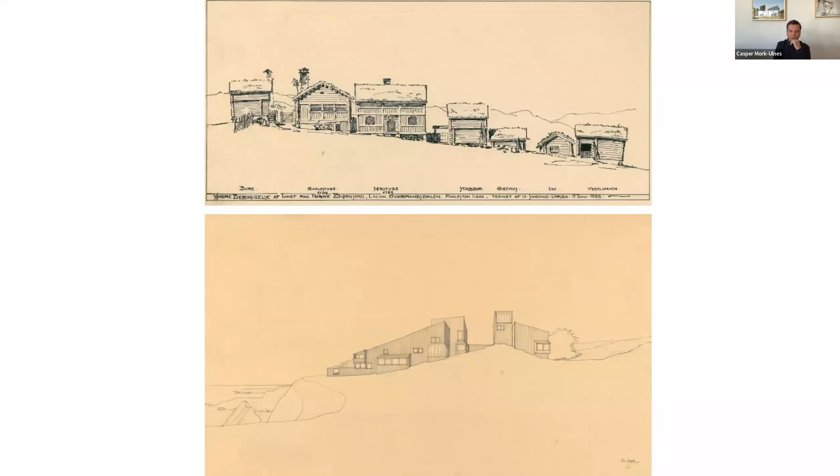Regarding the relationship of landscape to our buildings, our projects often explore the balance between being the object in the landscape and being part of the landscape. The first building at Sea Ranch is the illustration at the bottom, and the illustration at the top is the traditional Norwegian farm. The drawing of the Norwegian farm shows stepping buildings organized as a series of volumes clustered together, creating a collective form, growing over time and conforming to the landscape. It's a very typical typology you see all through Norway.

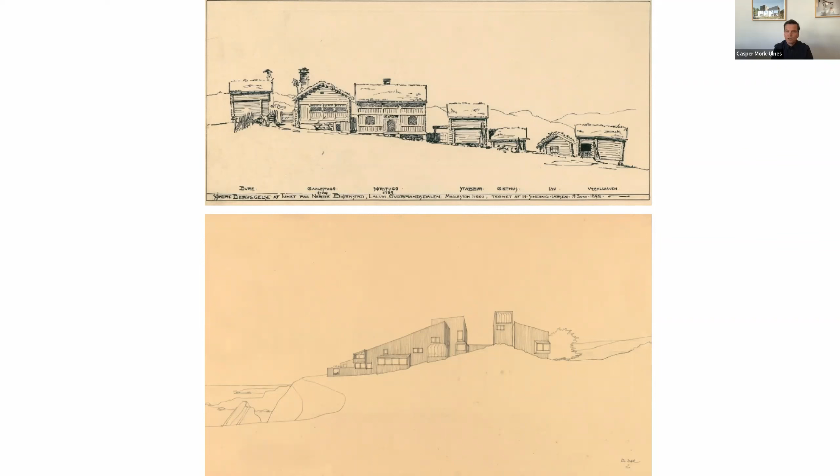Similarly, the building here at Sea Ranch integrates architecture and form to work with the landscape and nature, performatively responding to the strong prevailing winds coming up the coast, and also learning from agrarian structures of early settlers on the California coast, like the image I just showed, hugging the ground and following nature and the landscape. In both cases, I think it's an intelligence passed through generations, a heritage shared through architecture.

Lastly, the difference between the two cultures with regards to our clients. Obviously there are briefs, personalities, economic situations, etc. But in Norway, clients tend to be more practical and functionally driven, wanting low maintenance and simplicity. This might be ingrained in the culture after living in such a harsh environment for thousands of years, and also because prior to the oil economy, Norway was a relatively poor country. Our California clients, we find, are often more open to playfulness, which might follow a more open cultural lineage, and obviously the gentler climate that allows for this.

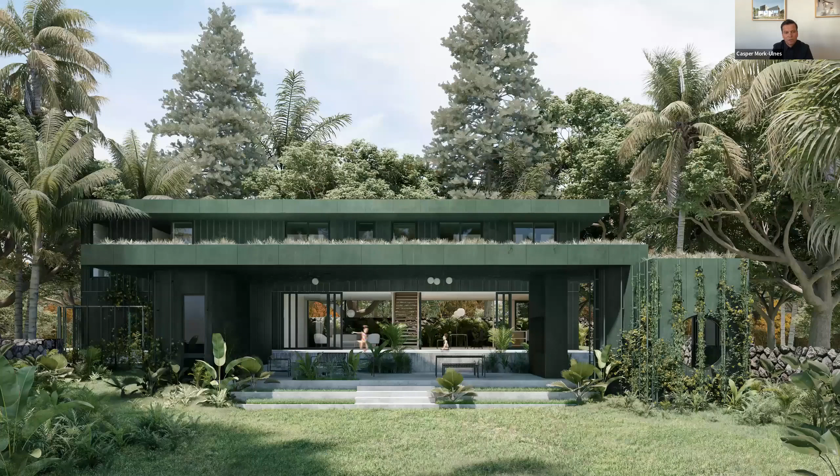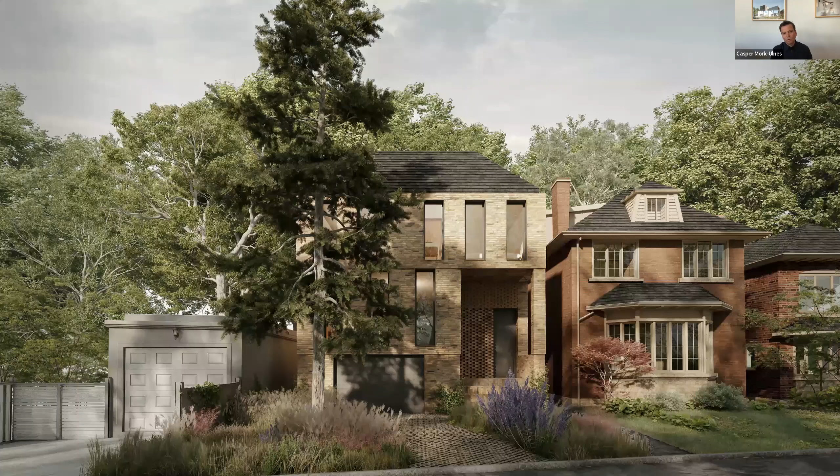So there are obviously contrasting directions from our clients in each location that affect the projects. Importantly, our project locations are starting to expand beyond California and Norway, so we're being introduced to new contexts and influences, which is exciting. We're studying new regional and cultural contexts, always enthusiastically looking for new responses to our clients' briefs. We have projects as far west as Hawaii, as far north in North America as Toronto, and in more far-flung parts of Europe, exploring these different geographic, cultural, and environmental contexts to drive our work forward.

This is the first group of projects I'm going to show, and the theme for the first three projects centers around buildings that reach out into the landscape, often to crop a particular view. This first group also has a similarity in spatial qualities, particularly in the floor plan. This first project is just outside of Oslo — a modest cabin of about 850 square feet with a small annex containing a sauna and some storage areas.

This is a traditional Norwegian cabin, drawn in the 1850s. It's very pared back and simple, and as you can see in the plan and section at the bottom, there's a central fireplace hearth that forms the heart of the building and creates different spatial zones within the cabin — areas for sleeping and areas for living. It's this fluid spatial concept, with the hearth as the solid element in the center, that really organizes the space.

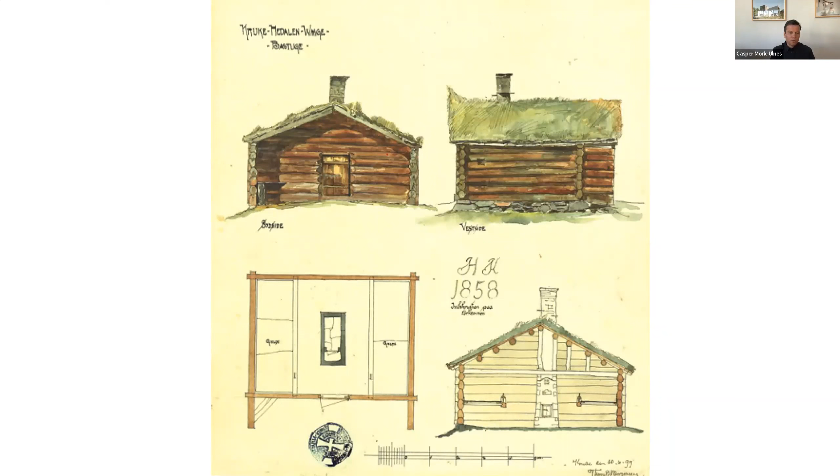So the concept here was to have these shifted wings that produce a pinwheel configuration, concentrating the sliding snow in two directions. This allows for two outdoor terraces and entryways that are free of falling snow and ice, based on the orientation of the building as well.

This creates two sheltered outdoor spaces, one for the morning sun and one to enjoy the evening sun, basically on the left-hand side and the right-hand side of the building, to make use of the limited solar exposure in this climate.

Additionally, there's views in different directions towards a lake, a forest, and a hillside. So as a strategy, we designed with the views in mind, with each one of the wings of the building pointing towards a view.

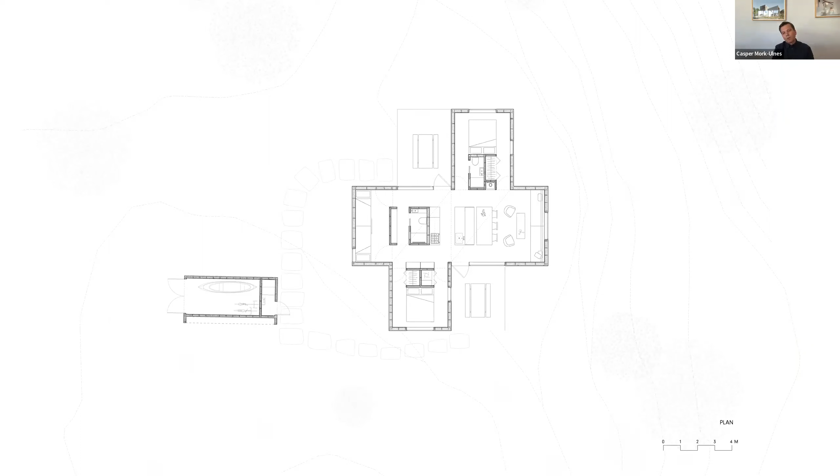That really helps with the economy of the space, making it feel, it sleeps 12 people, and it feels a lot bigger than it actually is.

The spatial arrangement gives an idea of the ability to allow expansive openness even on a small footprint, allowing the wings and zones to flow freely around the cabin and to the exterior. The center of the pinwheel plan becomes the hub of family life.

The functional roof profile combined with the pinwheel configuration produces a prismatic geometry that doesn't have a singular presence on the site, so you never perceive the building in its totality. It seems to change in size as you move around it, with a diminishing effect of scale, softening the impact on the site.

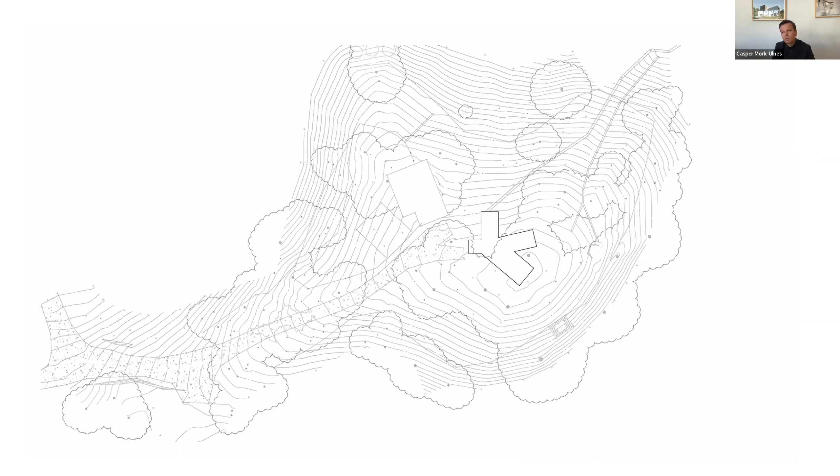This project shares some of the themes we explored in the previous project, but this is in California. It's also a cabin, about 1,100 square feet, slightly larger, on a remote site in the hills of Mendocino County. The site offers a unique overlook onto three locally celebrated landmarks, with beautiful heritage oak trees throughout. Working around the trees and the views were really the drivers of the design, so the challenge was providing those three views the clients wished for while saving the trees.

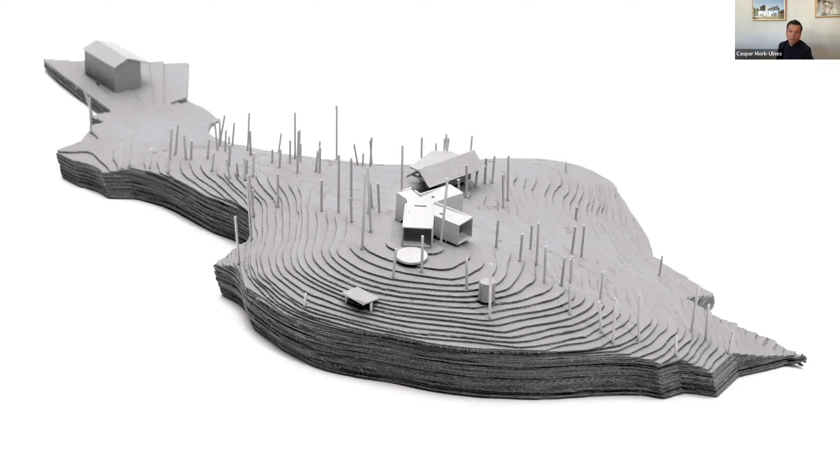The solution was to have more of a branching plan, instead of a pinwheel plan, that extends in each direction of the view, framing the landscapes beyond.

The first thing we did was meet with an arborist who told us we couldn't use conventional concrete foundations since that would sever the oak roots. So instead, we came up with a solution with the engineer to use slender piers and steel columns to avoid the roots, navigating the volumes around the trees, capturing the views and getting quite close to the trees with thin steel posts.

On one side, the building really hovers over the landscape, and the only part that touches down is the entry on the right. From the other side, it's barely lifted off the ground, maybe 6 inches or so at the lowest.

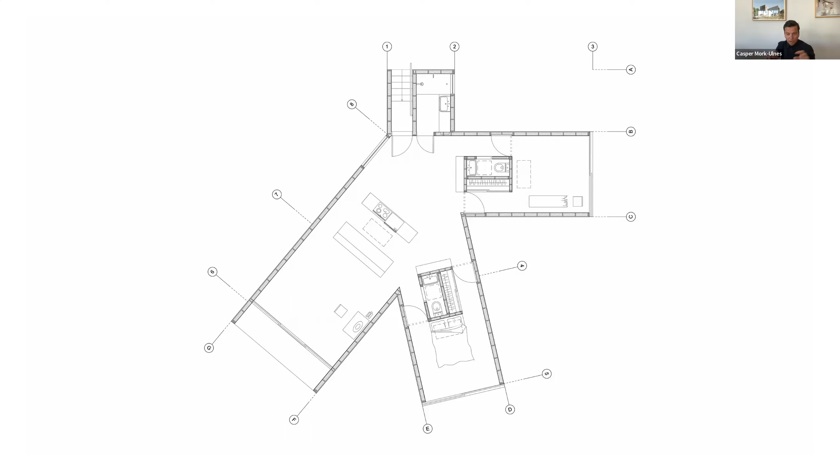The project had a very tight budget, which meant we had to keep the building compact. We used the same strategy as the previous project, placing the essential functional elements into utility cores that became anchors in which the rooms are more loosely defined, allowing for an open plan and continuity across all the rooms at once, with the doors being open as shown here.

Here is the convergence, the middle of the plan, where you can see it's an open and flexible center that has a vantage point out onto all three framed views beyond.

We didn't use large expensive glass, due in part to economy, but there was also the desire to really frame the particular view at the end of each space so that it appears open, but it's really succinctly calibrated to the views the client wanted to capture.

Similarly to the last project, there's an economy of materials with a directive from the clients to cut costs and minimize waste. The building was designed on a 4x8, 4x10 sheet, standard size, off-the-shelf sheet module.

The last project in this group is a bit larger, and we just completed it recently. It's maybe a progression of the themes I outlined so far, but it expands a bit with the use of courtyards.

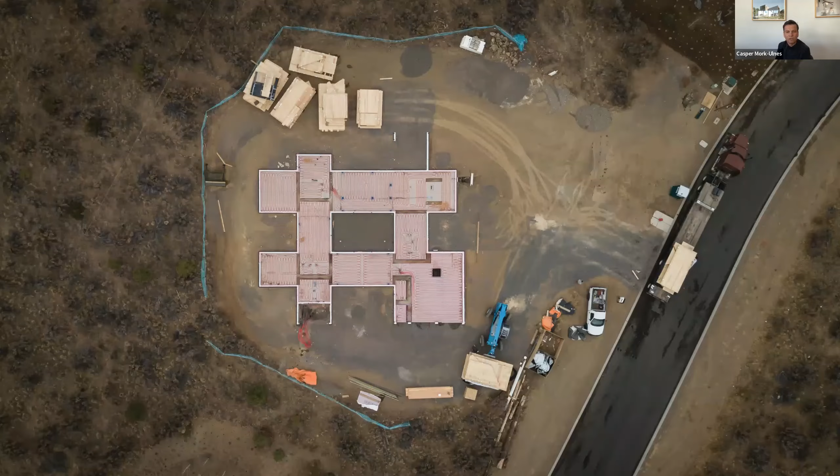On the top of the slide, you see the cross-laminated timber panels being staged, ready for installation. And here's a slide showing the CLT, as they're called, panels being installed.

I believe these were some of the first CLT panels produced in the US, and it was from a plant in Montana.

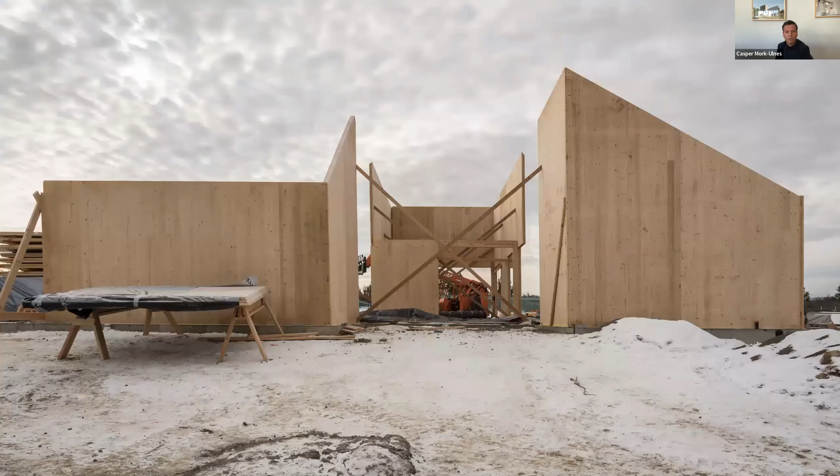Regarding the plan configuration in this project, courtyards that are both open and closed were used as a way to organize the space and shield from the hot summer sun as well as the winter winds.

The wings really reach out into the landscape, with the courtyard in the center becoming the hub of the home, creating more private spaces around it.

The roof form has some similarities with the first project I showed, but it's multiplied over a woven plan rather than the pinwheel cruciform plan.

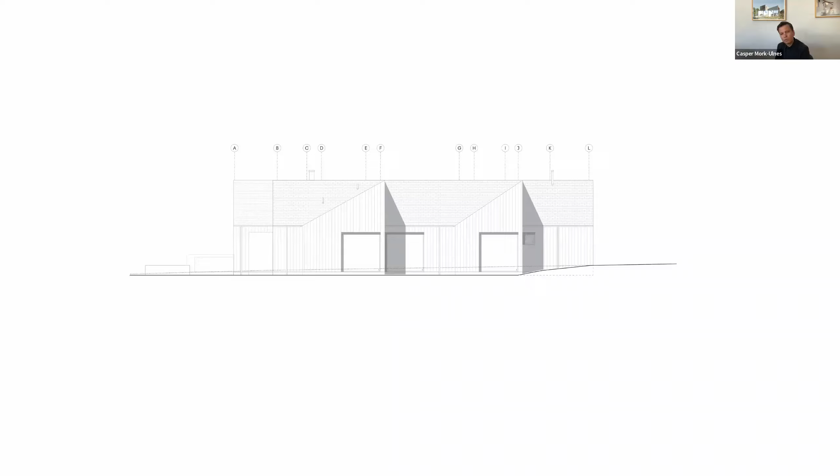So the building has a very different presence again on all sides, pursuing a sort of play with perception, evading this sort of singular reading as you're moving around the house on the exterior.

The dramatic slope of the roof obviously helps with shedding the snow, but it also has the benefit of introducing generous ceiling heights into each room.

Because the plan is such that the depths of all the spaces vary, but each room is the same height, the varying footprint gives you really a range of spatial qualities throughout the house.

The cross-laminated timber was left raw, and there was a lot of attention put into hiding the plumbing and the electrical to allow this completely wooden interior.

Here you can see some of the formal similarities to the two previous projects, but given more that it's a woven courtyard sort of mat typology.

It also has greater indoor-outdoor connection due to the larger windows than at least the Mylla cabin, and direct physical access to closed courtyards, as well as to the landscape beyond.

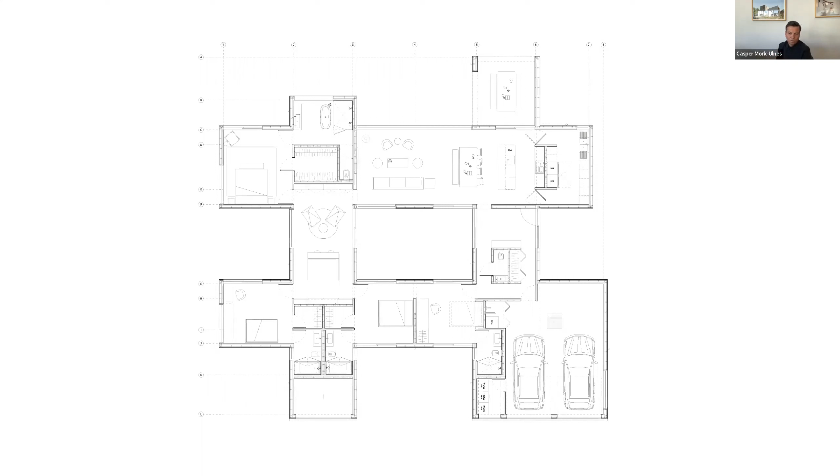But like the two other projects, the plan is really arranged to flow around the different zones of the house. So it's a house almost without corridors, and it has a porosity too, with views through the building and the courtyards out beyond to the landscape.

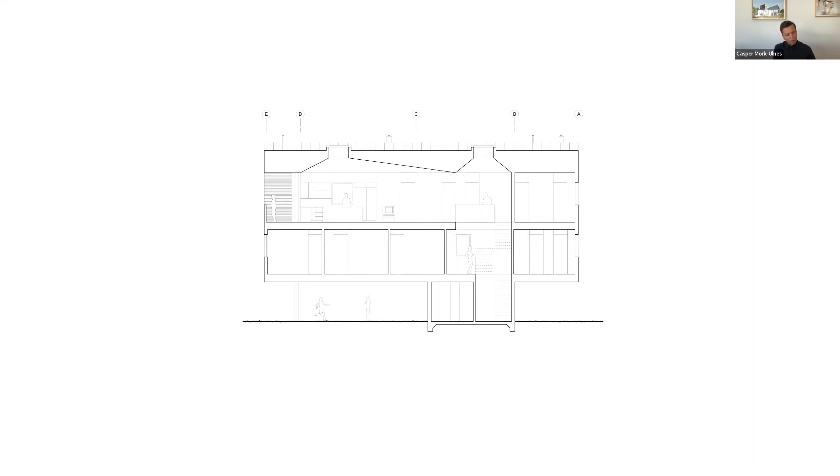The concept here was based on the Alpine Chalet building, where the house is lifted onto a plinth, in this case concrete, to protect it from the large amount of snow in wintertime. In the section, you can see the programmatic stacking, with the mudroom and ski area on the ground level, bedrooms on the second level, and public rooms on the top floor, punctuated with two skylights to define the public spaces. One skylight brings light all the way down into the ground level room.

This is the traditional Norwegian solution to deal with high snow, where the part of the building necessitating light and air is lifted off the ground, and a protected stairway mitigates the impact of the snow in winter.

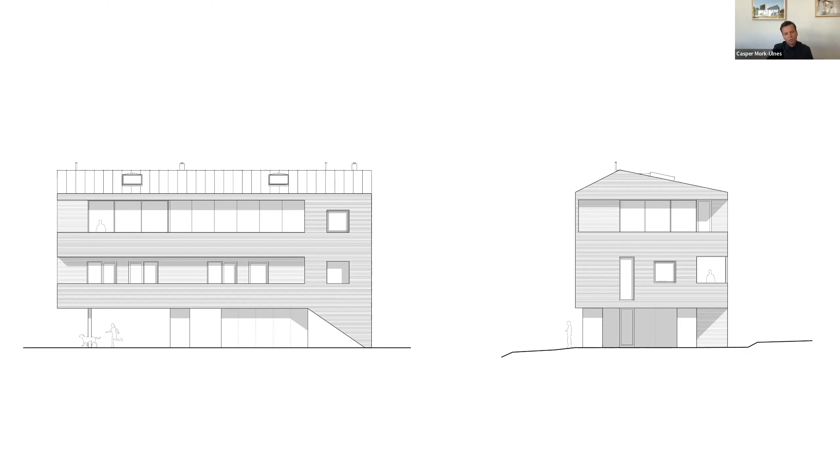This is our elevation of the south and west facades, showing the stairway and the concrete plinth. This is the north elevation, where the bathrooms, kitchen, and private program are stacked on this side to allow for minimal window openings, minimizing thermal loss on the north facade.

This is the same view, but with the lower level buried in snow. In the last few years, we've often seen snow all the way up to the windows on the second level. Here's a view of the concrete plinth, which needs to be robust so it can sit exposed to the snow for extended periods of time.

There are deep overhangs on the west and south facing facades to protect the large glazed openings and balconies from the snow. The pine tar I referred to earlier with the cousin storehouses is also used here - this is a stave church, very close to the farm and also quite close to the next project I'm going to show.

Both the stave church and this project in Tahoe are coated with pine tar, a sticky material produced by high temperature carbonization of pine wood. It's a key element in preserving Norwegian wooden structures, including this stave church, built around 1220, of which almost 30 still remain in Norway - buildings almost 1,000 years old, with the wood going almost all the way down to grade level, except for sitting on a concrete plinth.

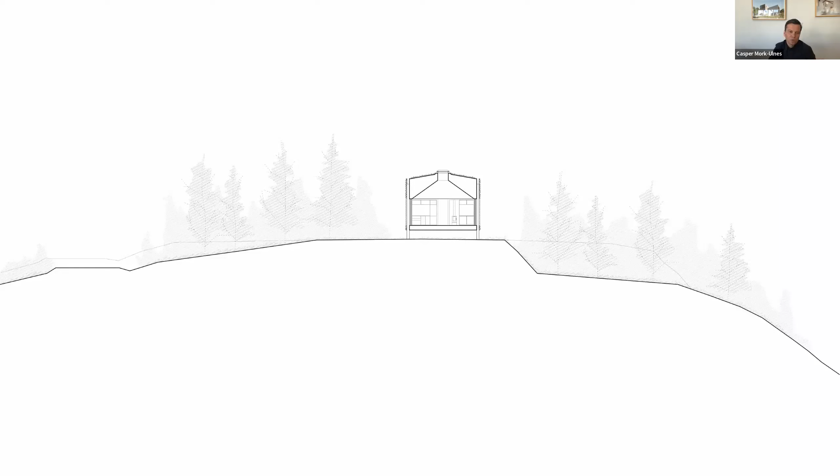It was important for us to save the existing topography and some of the old animal paths that went through the site, and also to deal with the snow issue. So the building is also lifted, similar to the previous project, following a common Norwegian historical approach to elevating buildings to straddle the topography, not just for snow.

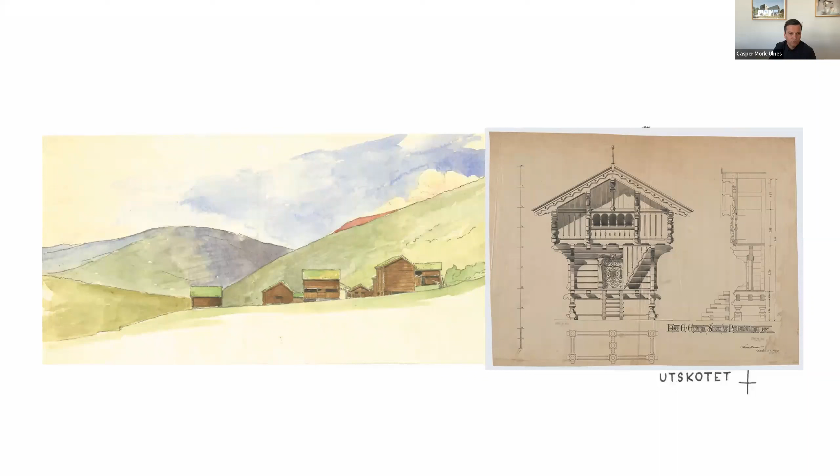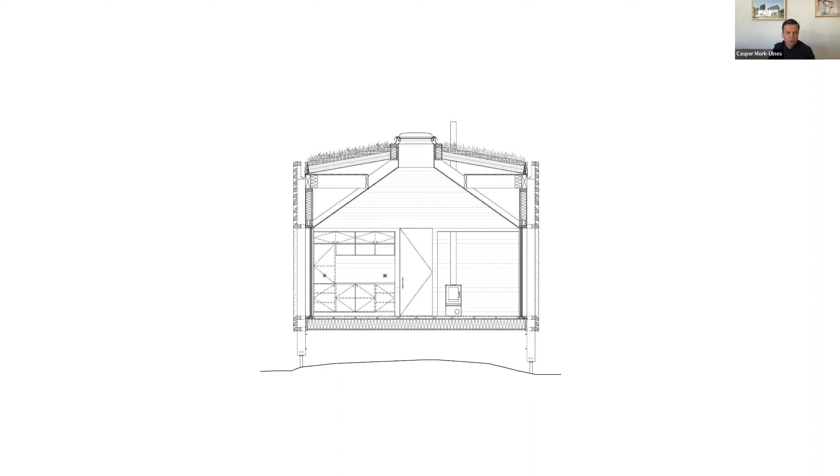Plus, buildings that also have a traditional sod or grass roof. The building is supported by 45 columns, so the cabin hovers between a foot to almost 5-6 feet above the ground, depending on the terrain below. It touches the ground very lightly, with cross-laminated timber columns sitting on very slender steel feet drilled into the rock surface, or sitting on tiny concrete piers where we couldn't reach the rock surface.

This diagram illustrates the assembly of the cabin, with the top part showing the roof being overgrown with the same native grasses found on the ground plane below, and also in centuries-old Norwegian buildings. A very simple technique, not comparable to the technique of doing green roofs here.

Below that, you see what we call 4 frustum-shaped ceilings with roof windows that punctuate and really divide the cabin into 4 spaces, with the intention to make it feel like 4 small cabins in a row instead of one larger space.

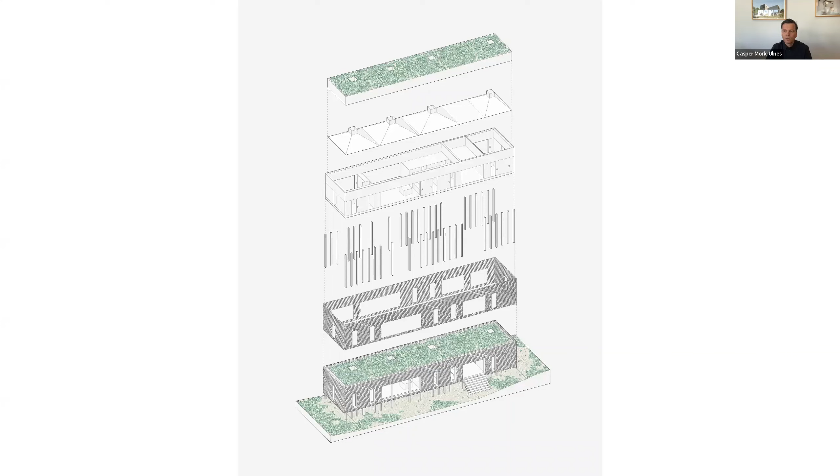Then we have opposing windows that allow you to see through the cabin and onto the adjacent landscape, so every room has a view. Then the columns, and the last layer is the wood skin that sleeves over the columns - really there to just protect the waterproofing membrane.

This shows the existing animal path from the parking area leading to the entry. The entry is a large punch out in the building, which creates the entry sequence and also hints at the visual permeability that runs through the entire house.

The plan in some ways follows another local historical precedent - a very simple typology with a long and narrow house, central circulation, and opposing windows to the exterior on opposite sides. This is a very traditional typology on farms, where as the generations could afford to, as economy or family needs allowed, they would add another carcass to expand the overall size of the house.

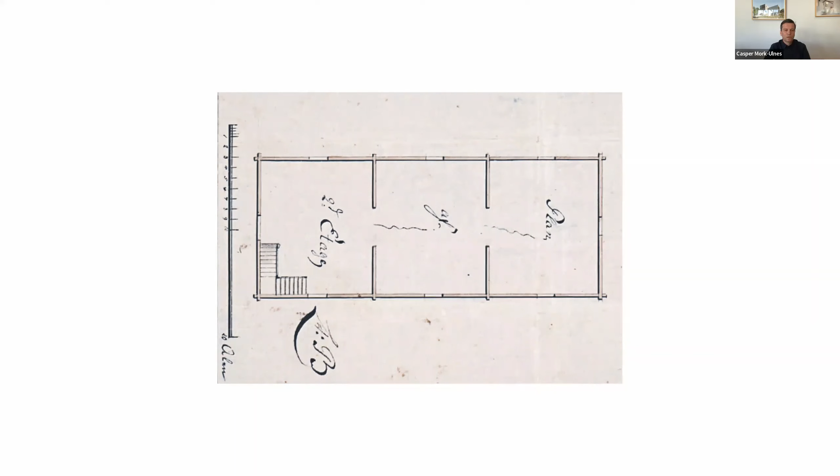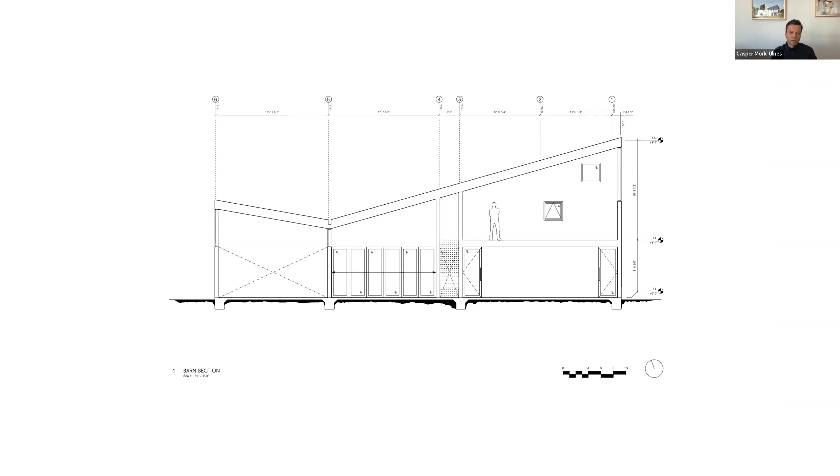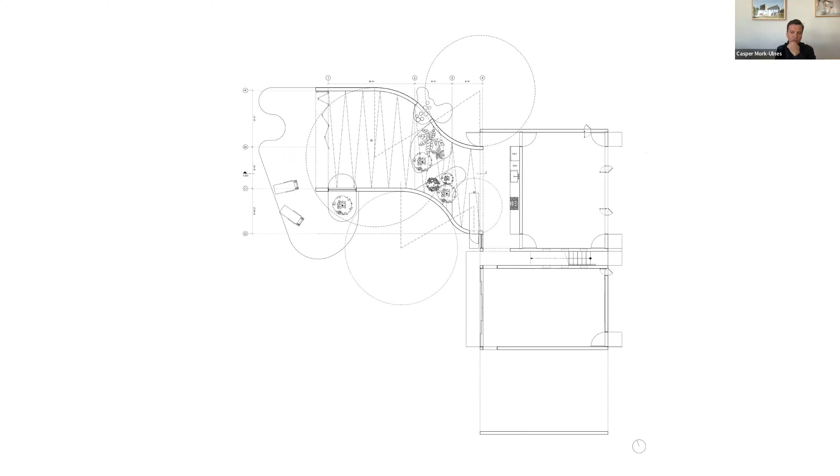About a year after we completed the main barn, our client asked us to design an extension to house an outdoor-indoor dining pavilion, and that's the result you see on the top left-hand side of the slide. This sort of more amoeba-esque form became an extension to the barn to host an indoor-outdoor kitchen, dining area, and a garden. You see the amoeba-like form emerging out of the existing barn structure.

With curving concrete walls standing in contrast to the rectilinear barn, yet tying the two together with the formwork, the concrete, the texture on the amoeba was created by using recycled wood siding, the same dimension and pattern as was used on the existing barn.

So both of these outward reaching forms are also extending upward, directing the inhabitants back to the landscape. And the landscape also reaches into the dining room through these organic planters that push into the interior space.

The curving walls were built out of gunite, which is basically spraying concrete up against the formwork, which means that the interior was hand troweled and smooth, and the exterior has the wood siding texture.

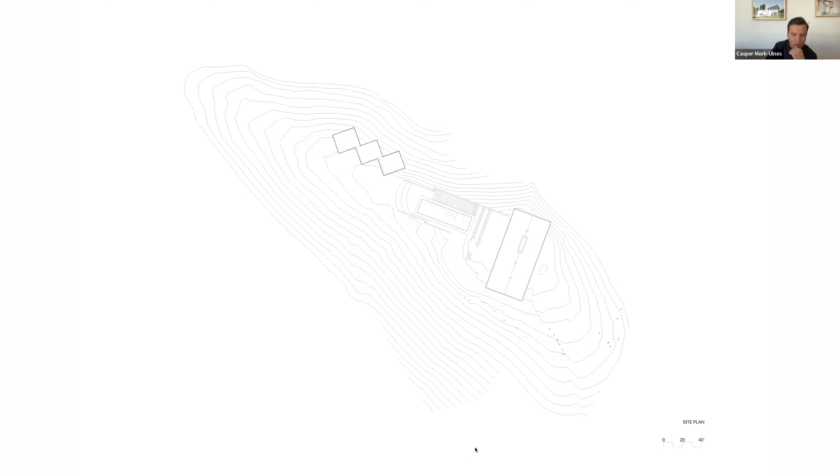The topography on the whole site is quite steep, except at the top of the ridge. So early on, we decided the guest houses needed a very deliberate approach to the hillside and be placed more along the ridge line, which allowed us to save some flat areas for outdoor use and created a dramatic interior experience for the guest houses.

This is a simple, straightforward plan showing the three volumes, each with a bedroom and bathroom. The bathrooms are stacked towards the pool and garden, the more public areas of the property, so there could be privacy between the exterior and the more private interiors, leaving the bedrooms more open to nature.

The whole structure is really all concrete, both inside and out, so it's a very monolithic structure.

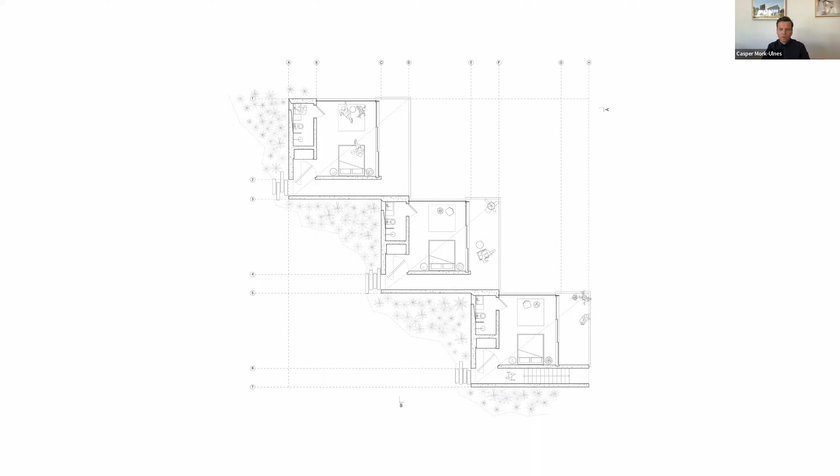We went to great lengths to develop the formwork, the way it's expressed both inside and out, in reference to the wooden barns in the area.

Being in the bedrooms really feels like a secluded world apart from the rest of the property, with this indoor-outdoor interplay, particularly with the operable glass wall towards the deck. Again, a desire to keep things simple and use a single material throughout.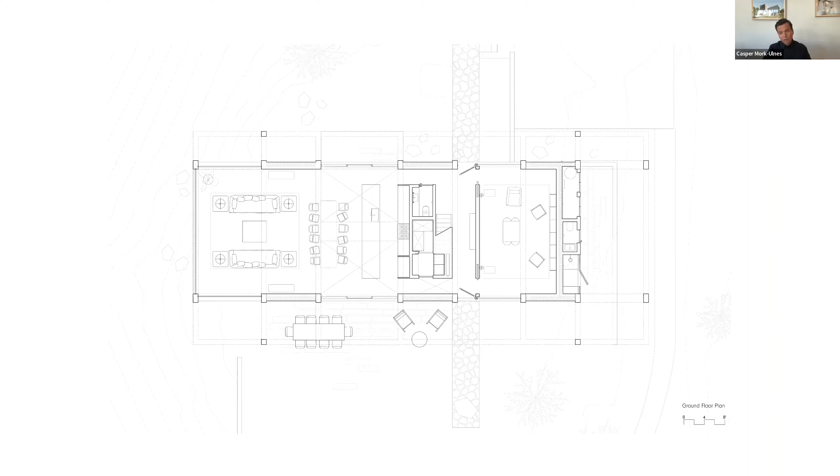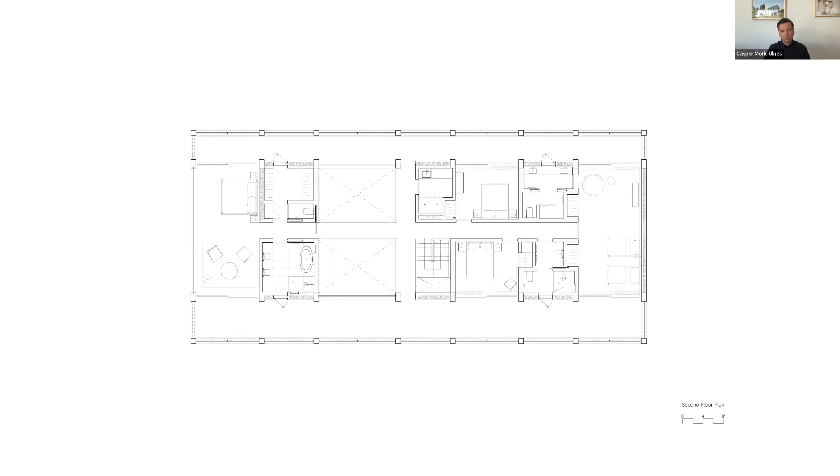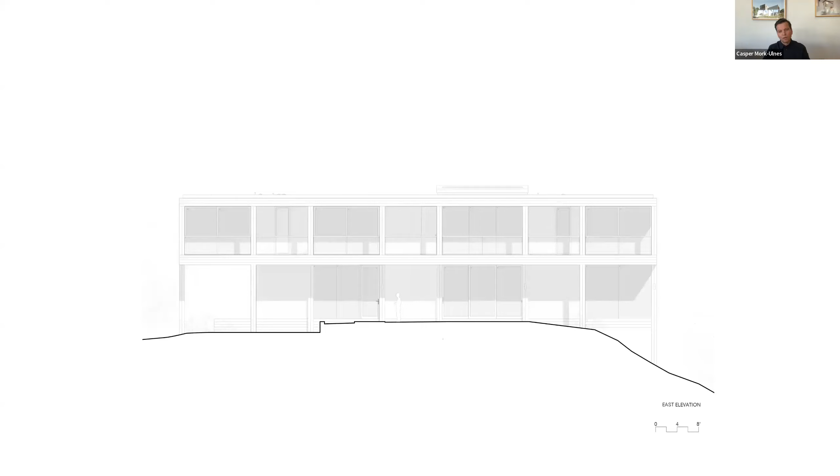Once inside, you have a sense of the panoramic views framed by this expressed structural framework, and the play of solid and void, how that crops and frames the panoramas with the use of the shear walls and framework structure, providing connections, physical and visual, to the surroundings—a sort of positive and negative of open and closed apertures and indoor-outdoor interplay, as well as sightlines through the house, allowing your eye to travel to distant vantage points, and the upper level framing views to the landscape far beyond.